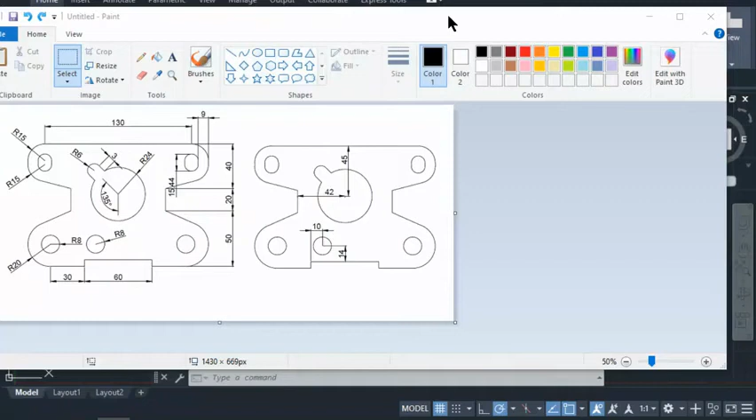All right guys, so in this problem here I'm going to walk you guys through how to do this with exercise number 2. As you guys saw in class, we already done most of them, so I'm going to keep going back to the beginning and start drawing for those who wasn't paying attention or need to see it again.

So let's talk about the problem before we do it. The height of this whole thing, as you can see on the right-hand side, is 40 plus 20 plus 50, that's all the way to the bottom up here. So that is 110. And then on the right-hand side here, you can see little steps right here. We need to figure out what that step's measurement is, right?

So you can see the center of this small circle down to that top ledge is 14. Now on the left-hand side here, the radius of this big circle is 20. That means from the center of that circle down to this edge is also 20. So that's 20 versus 14, so the difference here will be 6. So we can see that.

Now how I'm going to draw this is I'm basically going to use my mirror option. So I split this in half. I'll draw the left-hand side, and then I mirror it to the right. After I'm done with that, I can go back and draw the circles, the big one and the small one. So I'm going to do that at the end.

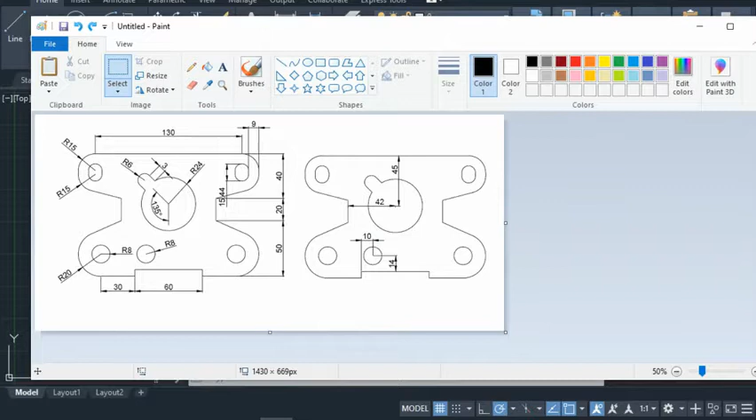All right guys, so let's take a look at this problem one more time. The measurement over here we're going to talk about, but first let's go up 104 — we did the math earlier if you don't remember. And then go to the left half of 130, which is 65. And then I'm going to go down 15 to get this first arc here, so I'm going to go ahead and draw that first.

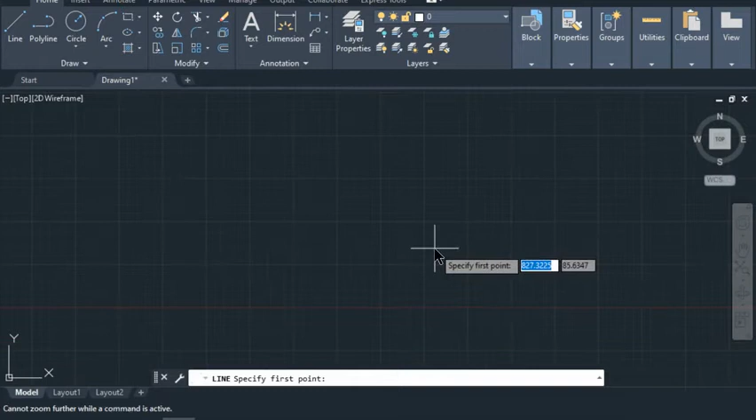All right, go into my line. I'm going to zoom in a little bit so I have more room to work with. All right, go up 104, 104, enter. And I'm going to go to the left with my snap line — make sure you have those snap lines on — and this is 65.

Now if you don't have this snap line on, this is how you change that. Make sure that all your center point, midpoint, end points, all of those show up. Make sure you have your angle snap showing on as well, and your tracking — make sure those are on and off. So make sure it's on for me, so you can see all those other things.

And then you can see when you switch between the ortho modes, those change, so make sure you know which one you're on. I want you guys to be on here because we'll work with some angles right here. All right, so we are done there.

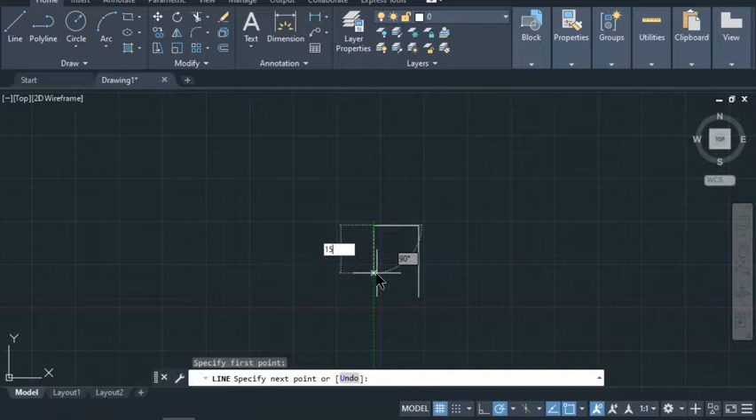Let's go down 15 as we said. We are going down there. All right, let's zoom in — double click your middle mouse or the wheel, that will zoom in, and then you can use that mouse to zoom out just a little bit. And the hand, if you hold down the wheel, you're able to pan left and right.

Okay, now something happened to my ribbon today — it's in this kind of form, so I have to open this to see the palette. But if yours is different than mine today, you saw we did it differently yesterday, so it's there. All right, so under properties we're going to go here, and by layer, we're going to click on that.

We right now have by block and by continuous. That was not part of our drawing, so we want to change this into a construction line or a center line. So I'm going to go to other, and the window shows up on my other screen, so I'm going to go over here. You click on load, and when you click on load this window shows up, and I want you guys to look for the center line.

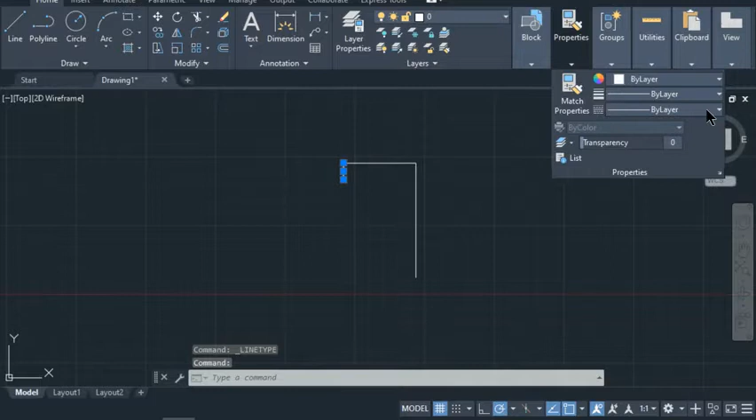So the long and short center line — this one right here will work. We're going to select that one, click OK, and it's there now. So we have that. I want to change this into that center line, so go to property, select it. Now it's there, center. All right, hit escape.

And then you can zoom in to see it's right there, it's the center line. You don't see that it's changed, but it did. All right, then we're going to draw that circle of 15. So we're done with that. The next thing we're going to talk about is this section here.

What is the measurement of this whole thing going to be? It's 15 down here, it's 15 right here, that little gap there. I went back and looked at this problem. The way they set this up for this measurement, the comma separates them. So they said that this right here, 44, is the distance between the two small arcs after they are offset from the side. I believe that yesterday we did the math and it came out to be 10.

But it's actually, let's do 10 to concentrate, because now if we are doing 44, we have to change the unit and everything else. So let's stay with that. We said yesterday that's 10, so we're going to use 10 for this right here. So we're going to draw in 10. And after we've done that 10, we draw another 15, and then we draw the big circle.

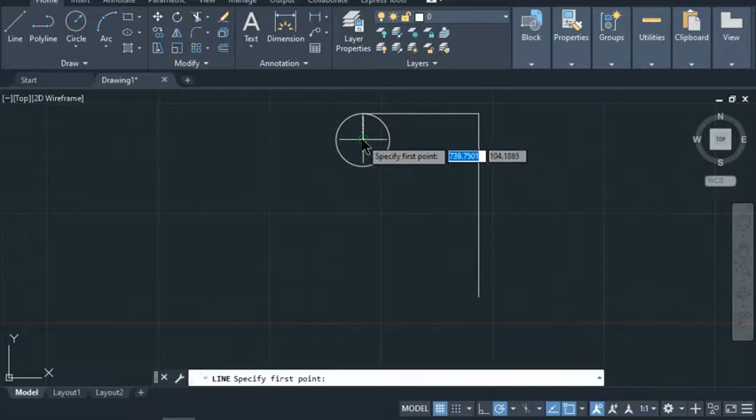All right, so let's go back to drawing. Here we're going to go down to be 10. And that 10 is also going to be a center line for us. Now, if you don't want to do the center line things, you can go back and trim everything that you add on, or you can do a color later, and I'll show you that next.

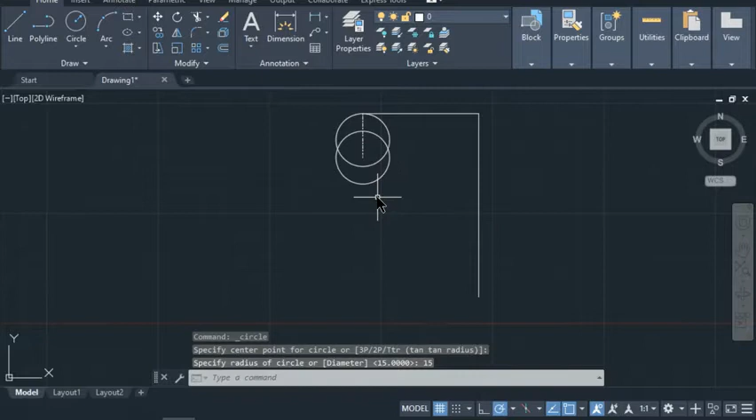But we're going to draw the circle now using this endpoint to draw a circle, and this is also 15. All right, so we have that. Hit escape. Now it may not be a good idea to change that to center line, because now we're going to use that. So let's change it back to continuous.

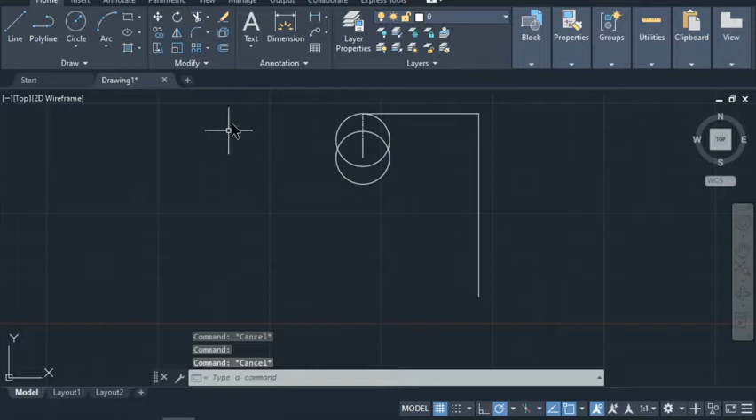We're going to use this to offset. We want to offset this to the left, and we want to offset this to the right, so we can connect the two circles here. All right, so let's do that. Here's your offset under modify. Click on that, and we want this offset to the left and the right, so we want its offset to be 15.

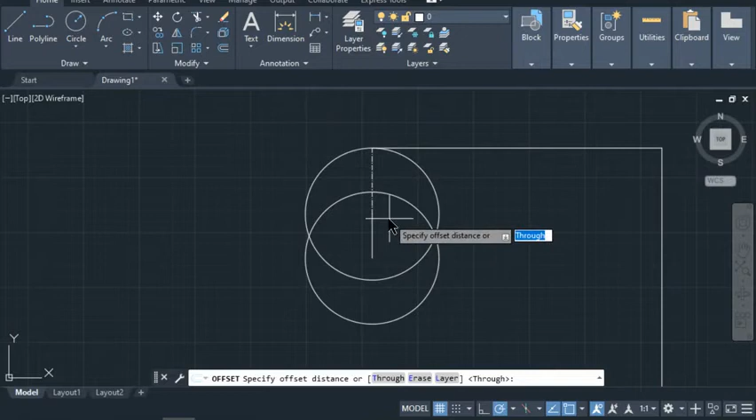So I'm going to click on it, try not to click on the center. I'm going to go ahead and try to zoom in. The center is when the triangles show up. So I'm going to offset this right here to the right. Let's go back here, offset, and then I'm going to put in a measurement, which is 15. I hit enter, and now I select the object. This one is snapped right there.

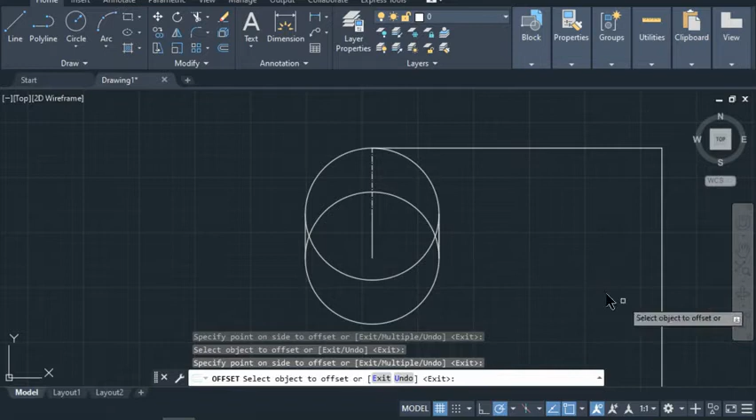I'm going to click. Oops. All right, click over here. It's there now. All right, and then we're going to do the same thing one more time. We're going to go to the right. There we are, so we got that offset. All right, we hit enter.

We're done. Now we want to get out of this offset. Make sure you hit escape multiple times, because escape doesn't change anything, it just gets you out if you hit it multiple times. Now what you're going to do is you can go and see the problem again. We can trim those later, we can work on that later. So we have that right there.

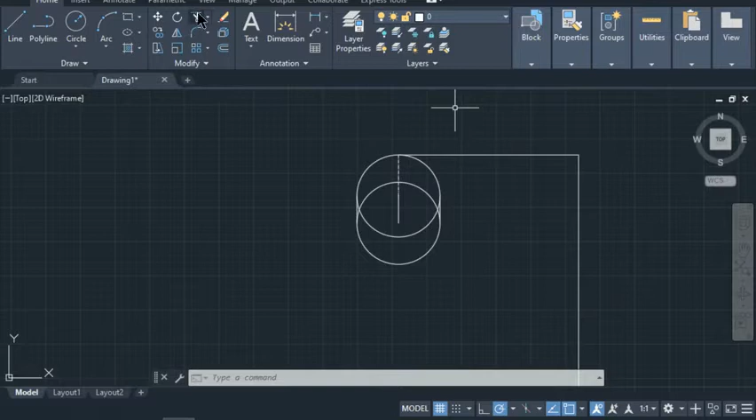Okay, let's just trim some of this so you can see, because this, we don't need this right here, right? All right, you don't need that. And then you can zoom in, you can see that we can trim this right here, and we can trim this right here as well. Let's do that right now. And we can also trim this right now.

So you guys can see this is what it looked like right here compared to our drawing, right, for the outside right now. But the outside arc doesn't have this one right here. We're going to trim that later, but we need to have this right here first. So let's go back here.

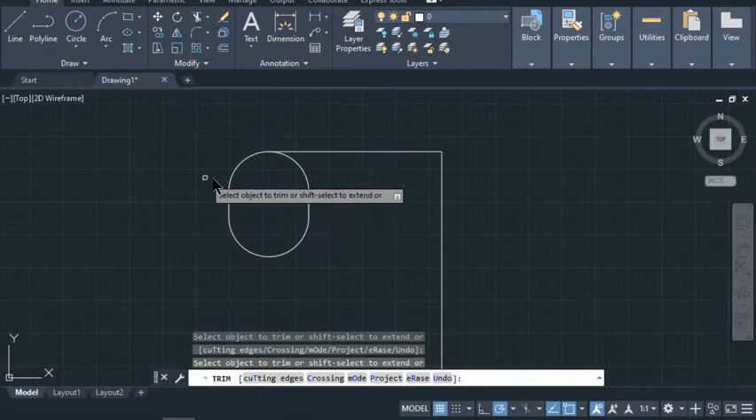All right, we're going to use the offset one more time, and this time we're going to offset it, the thickness of this right here is 9 units. So we're going to offset it 9 units. So we're going to put 9, enter, and then we're going to select what we want to offset.

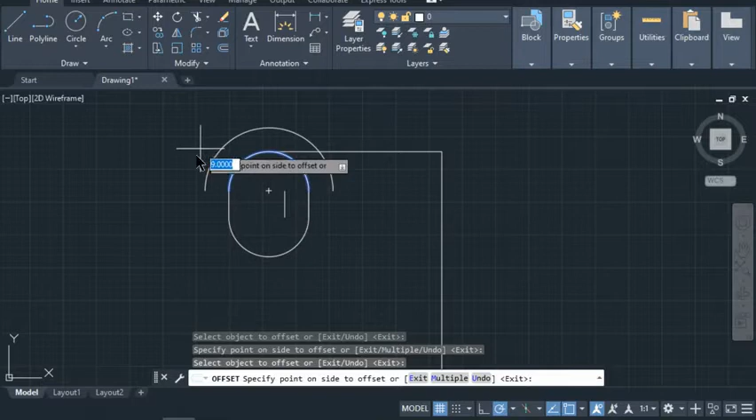There you go, and now offset again. You want it to be inside, on the inside. Offset again, on the inside. There you are. You have that right there. That's what you're looking for.

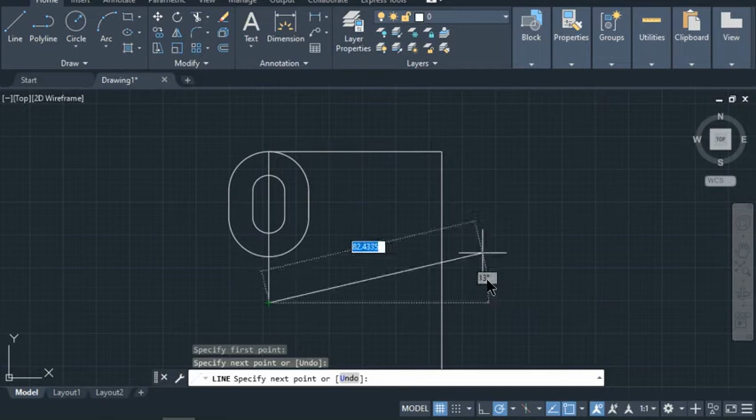Now if you really want to trim it, you can draw that line segment. Make sure it follows this green snap line, and then you can trim the big circle. Usually I don't do this until the end, but I'm doing it now so you guys can see the drawing as it comes into almost where it needs to be. As you can see, that's what it looks like now after you trim things. So you may want to wait for the trim later, but that's what it is.

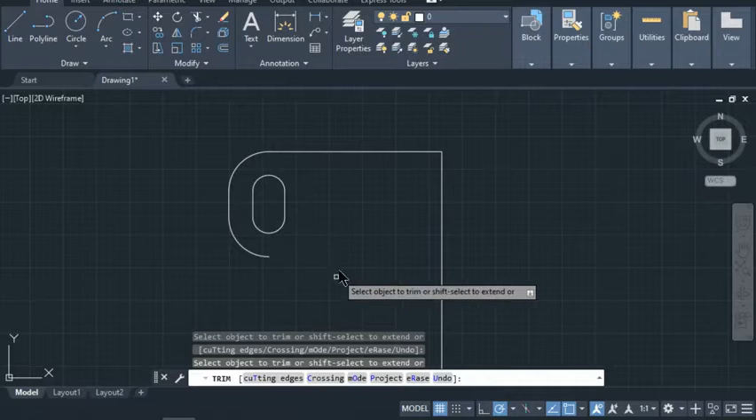All right, so here we are, got that corner, and we're going to stop right here. We're going to go back down to the bottom.

In the bottom here, I'm going to go right here again. I'm going to go to the left half of the 60, so it's 30, and then go down 6 and go to the left 30. I know the radius here for that point, the center, is 20 units up, so I'm going to go 30, 6, 30, 20. All right, let's do that.

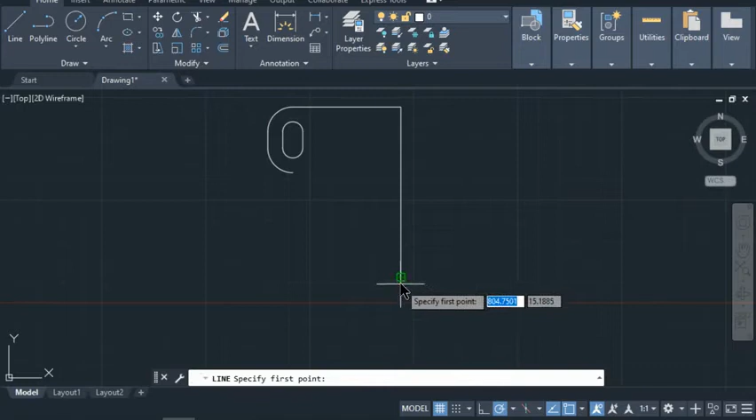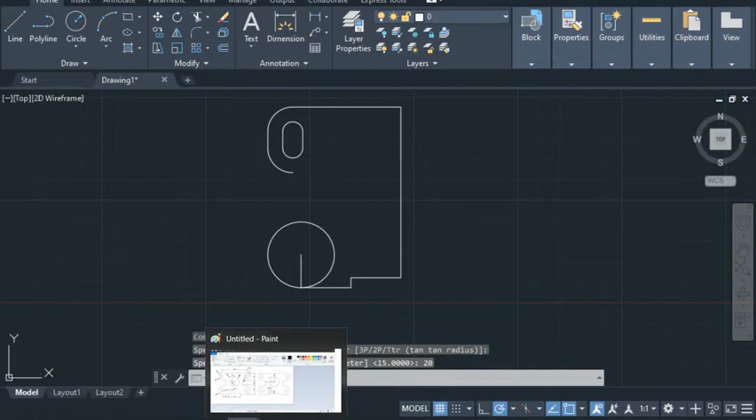And 20. All right, and hit escape. Here we can go in and draw that circle of radius 20 that we just established at the center point, this one. We also notice that this small circle shares the same center, and its radius is 8.

So we're going to go back to our drawing. We draw another circle here of radius 8. All right, so we got those circles, and let's go ahead and escape out of here.

So we have that. All right, let's go back to the drawing, and then we need to make sure we have this line somewhere here before we attach them to it. So we're going to call this halfway. Now, I remember yesterday we talked about this, and some people know that we don't know for sure. So we're just going to guesstimate here because of the measurements.

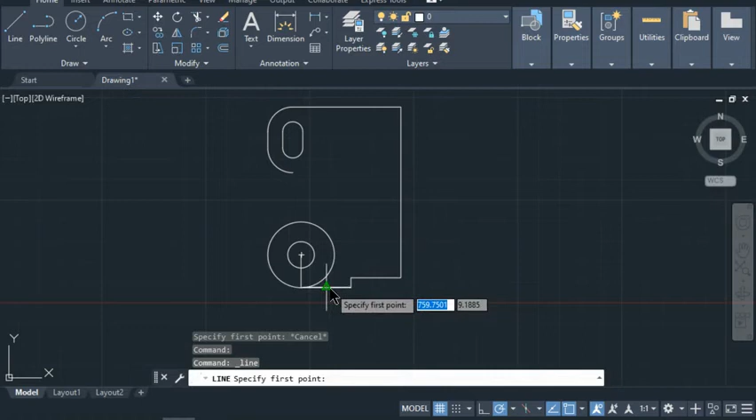All right, so let's go ahead, click on line, and then put it in here until we see our midpoint show up. I want to make sure our snap is turned on for the midpoint, so when we are in the line, you can see the triangle show up. That's the midpoint. I'm going to go all the way up here on the top. There we go, hit escape. All right, so I have that.

Now what I need to know is where is this one. This one is the same as this on the right hand side. You know the length of that is 20. We need that to be 20, and that is 40 from the top. So the top down 40 and the bottom up 50. That's basically how you do it. So let's go here.

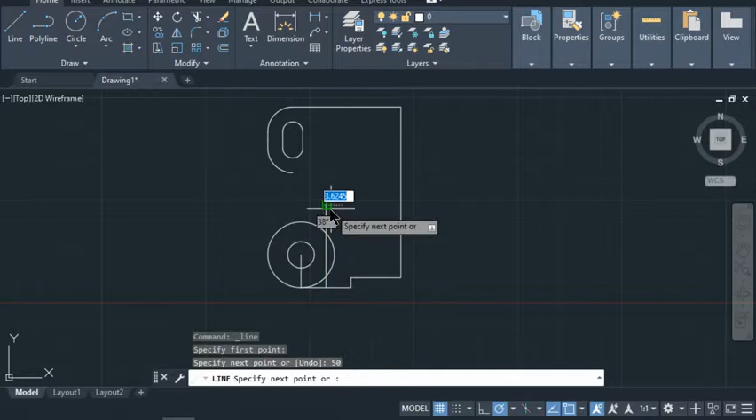There's two ways of doing this. You can get rid of this actually if you want to, and then go back to the midpoint and draw up 50. Then from there you can go up another 20. All right, so you have that 20, and then you can go back down here to this 50 and hit delete. So you're gone, you don't need that anymore. So that is a way of doing it.

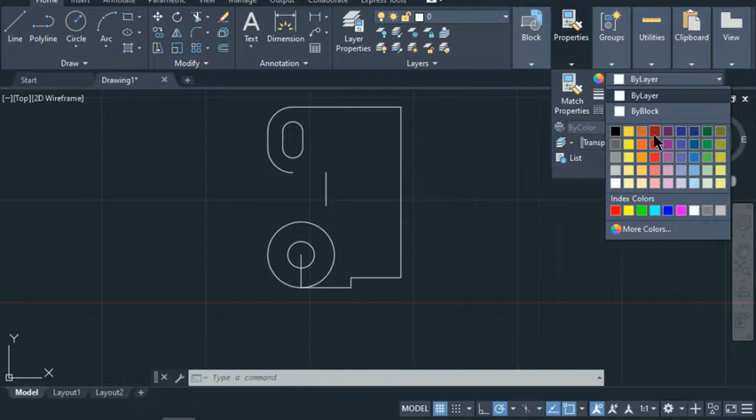And then all you have to do now is connect these two here. But before you even connect that, let's go and do this drawing. But first, I'm going to change the color a little bit. Under my property, I'm going to change this to red so you can see what I'm doing. Right here, I'm going to draw a line all the way up. It's going to be vertical.

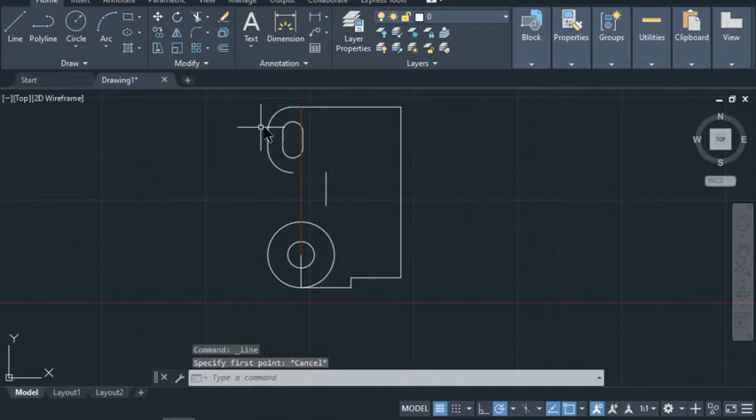Hit escape, and then I'm going to go over here at the end of that 65. All right, I want to make sure this is the line that I'm actually using, not the end of the 65, but this right here. I'm going to go there and find that.

I'm going to draw straight down just as far as it's across that arc. That's all I need, because I'm going to go here and trim. I'm going to trim this little arc right there, and when I'm done with that, I don't need this red line anymore. I trim it. Same thing here, I can go and trim this arc because I don't need that. And if I'm done with it, I can also trim this line segment, I can trim all of that.

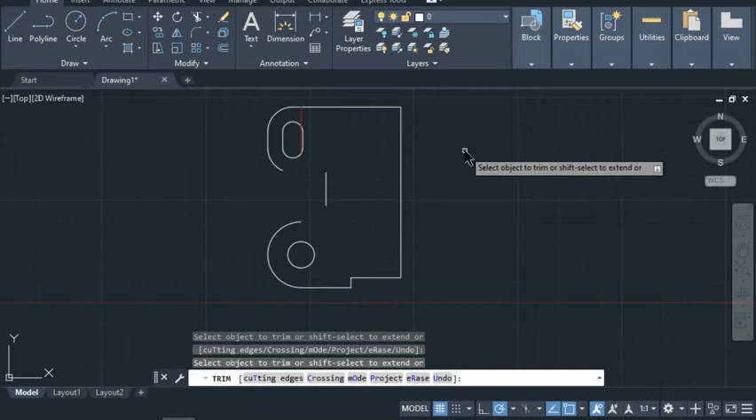All right, now I have to zoom in a little bit to trim that. Zoom back out. Now all I have to do now is just connect this endpoint.

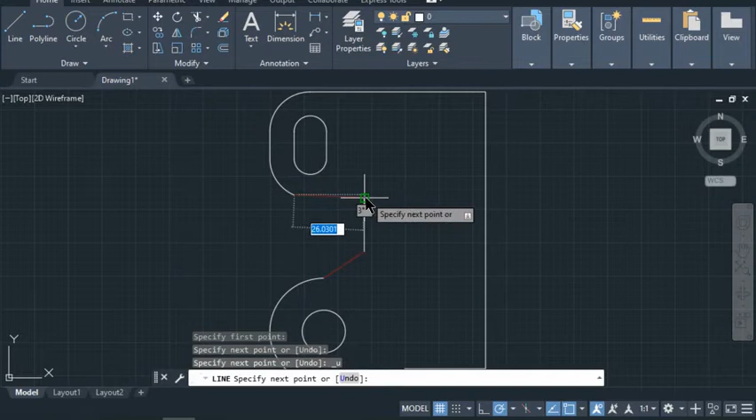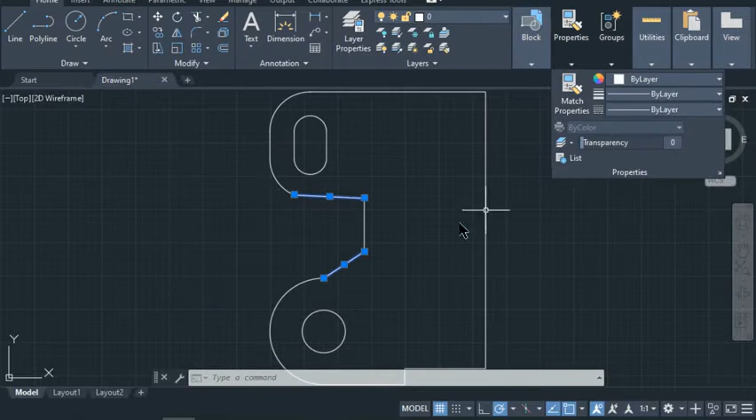And I know that is now in a different color than what we want, but we can undo that. I just need to snap into that location. What I need to do now is go back to property. I'm going to select both of them first, then change the layer under property back to white.

We have that problem right now. Now it looks almost the same as the drawing, but it is. We cannot zoom in right here, but if we zoom into here, there's a little gap, not straight all the way. So that is what we have on the left.

What we need to do now is use this information and mirror it to the right so we have the same thing. I'm going to go to the mirror option here, select object, select this whole thing. I have all of that. I'm going to mirror that about this point.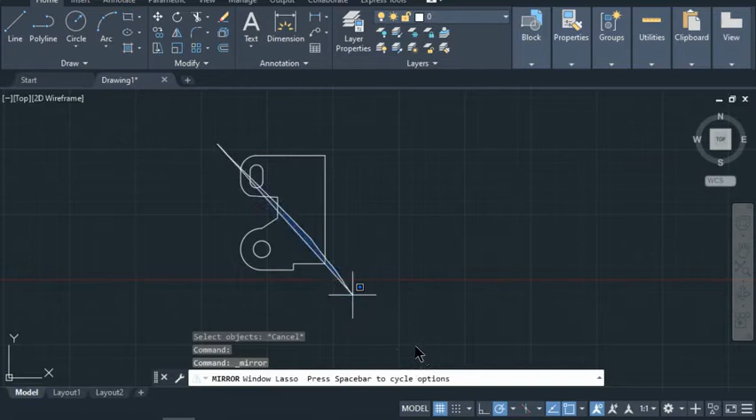Let me click on the mirror option again. I want to mirror this whole thing. I want it to mirror about this object.

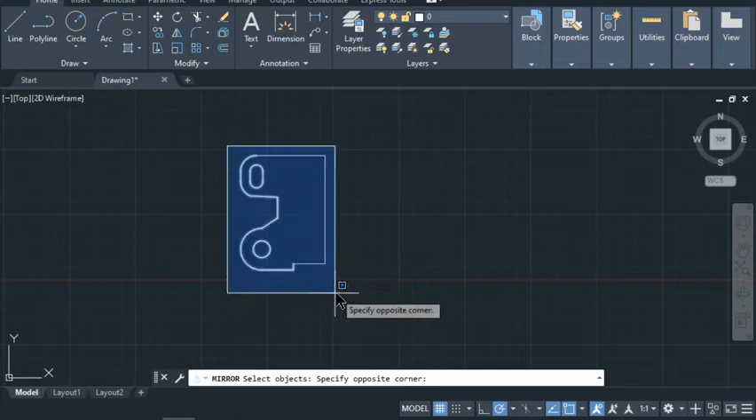It's not doing that for me. I'm sorry, I got the same problem yesterday. Mirror, I am in the mirror. Hit enter.

And I need to mirror it about this point, so now I can mirror around that. When I snap into that location, I just click enter, and it asks me if I want to erase it. No. But I'm going to do that again so you guys can see.

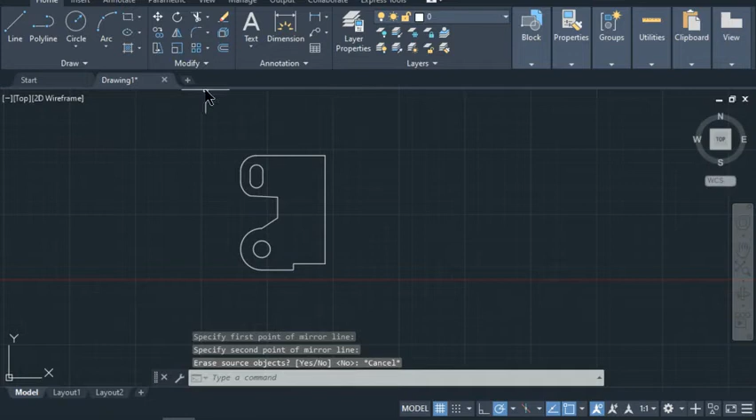Again, I click on mirror, I select everything that I want to mirror, I hit enter, then I click on this location on top because that's what I wanted to mirror about. Then I click on the other endpoint, and when it asks if I want to erase, I say no.

Here we go, we have that, same thing. What we're going to do next is click on here, and I don't need this line in the center anymore, so I trim it.

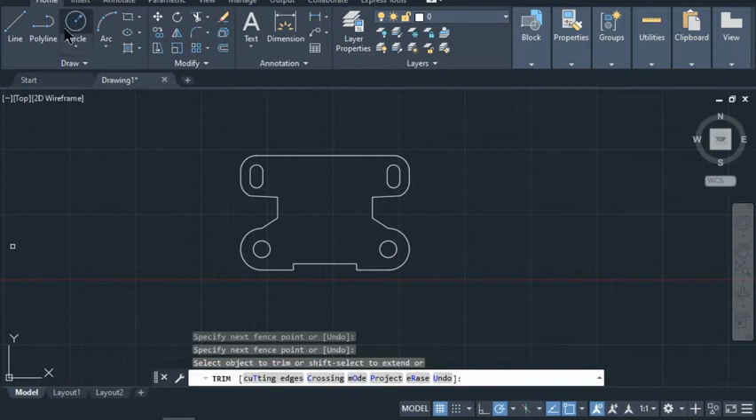So what I need to do now is draw this big and this small circle. The small circle is easy to do first. You can see the center here is 14 from the edge, and then it's 10 from the right hand side coming in. So I can go up 14 and then right 10 from this corner here. Let's do that, and I can do this in a different color so you can see it.

I'm going to go line, from here up 14, and then to the right 10. That will be the center where I'm going to use to draw my circle. I know my circle is going to be white, so I'm going to change it back to white. That's going to be 8. So there you go.

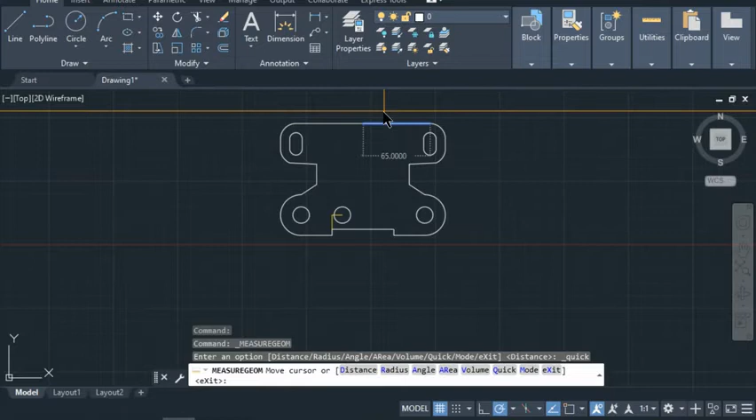That's the circle. By the way, if you click on the utilities, the measure, and click on quick distance, just a quick one, you can put your mouse everywhere and see your measurements. You can see that length is 20, that is 8, that is radius 20, that is 30. So 30 and 30 is 60, that is 30. Up here is 65, 65 and 65, that's 130. You can see all of those measurements, and you can see the gap, that's 9, because that's all the measurements that show up.

All right, let's go here and let's get rid of the yellow construction line that we created.

All right, hit escape to get out of it. Now let's go draw the last thing, which is the big circle. The big circle is 45 from the top down and 42 from the left in. That's the center, right? 45 and 42.

So what we can do is go back to our drawing. Here is our center, right? So we're going to go from there down. We need to go down 45, and then we're going to go to the left 42.

So let's do it this way. Let's draw them, down 45. Draw that first, hit enter, right? And then go escape. We're going to draw another line here, click the line.

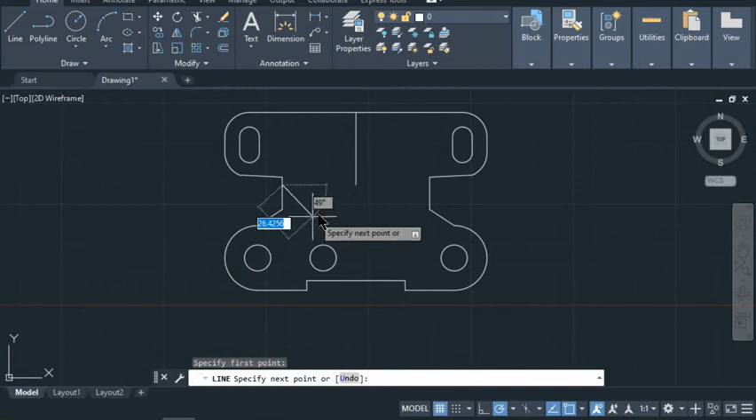We're going to go here, but we're not going to click on anything. Just move your mouse to the left side until you see this show up. And then when it snaps into that, when you have that cross, hit click, and then you're going to draw that to the right, making sure it's 42. Hit escape, and you can see the center is right here at the endpoint.

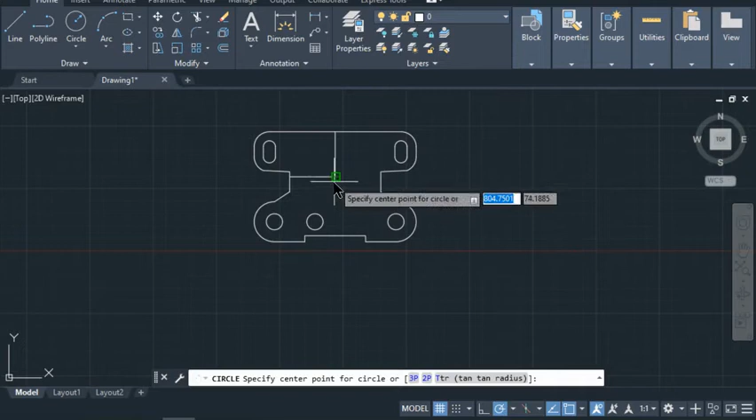If I draw a circle, that is the center. This is not it, right? We know that this distance from here to the top is 45, and it's 42 in from the left side. So that's why we draw this first, and then use that to draw this circle here.

And this is 24 in radius. All right, so when we're done with that, let's go ahead and trim the thing that we don't need right now, because we will create some lines that we need. Oops, we don't want to get rid of that center because we need it to draw something. All right, escape, let's go.

Take a look here. We need to have an angle of 135. That is where we're going to start drawing something so we can use as reference to draw this little bump right here. All right, the angle is 135. So let's go take a look here.

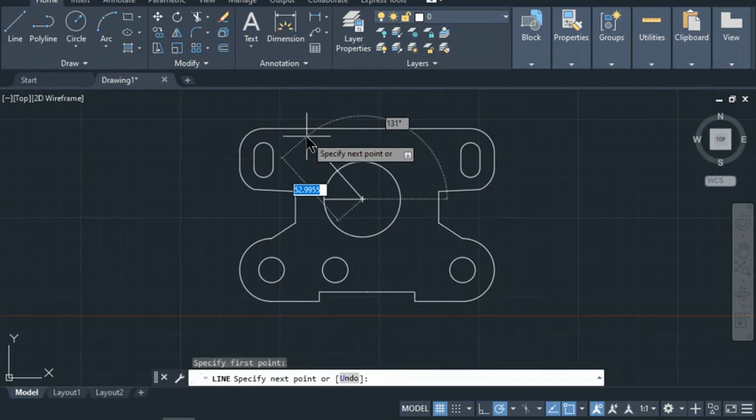Line, I'm going to go here, click, and I can drag it up. The angle that you see right now, that's 130. That angle is actually the same as this angle, because if I draw...

Let me change my brush too. If I draw something like from here... if I draw that line... Control Z, sorry. If I draw this, if I extend this right here, and if I extend this right up, you can see this angle here is the same as this angle on the right hand side, right?

So those angles are what we call vertical angles, so they are the same angle. So in here, this angle is the same as the angle that we need, so it's 135. That's what we need. All right, hit tab, because now we need to figure out how far we need to take this one out.

So let's go back to our sketch. All right, take a look at this. The radius is 24, so we're going to go out 24, and then you can see this is 3, so that means it's going to go up another 3, so that is 27.

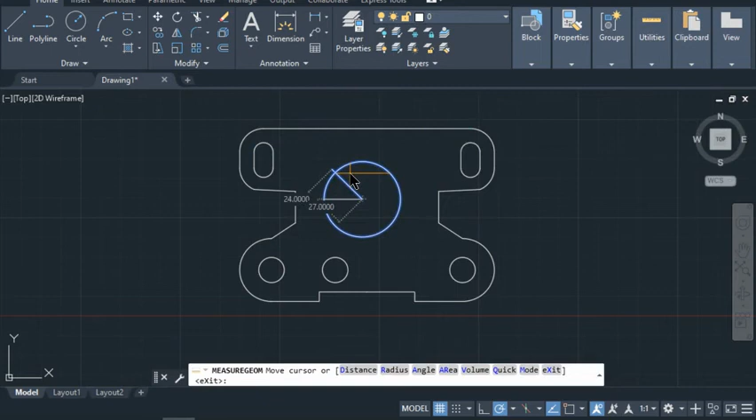We need to go 27 to get into the center here for this arc. All right, so I'm going to do that as 27, hit enter. Okay, I need to double check that that is 27. It doesn't look like it, but let me see here. I'm not sure if it's 27. It is 27. All right, hit escape.

I'm going to go ahead and trim what I need to trim. I don't need this. I may need this, but let's leave it there for a second. All right, hit escape. Let's go here and we're going to draw that little arc.

And I forgot the dimension of that. That arc is 6. The radius of that is 6. So I'm going to draw that, call it 6, enter. All right, and then you can go here and trim out the part that you don't need, which is here, but there's more stuff that you need to trim.

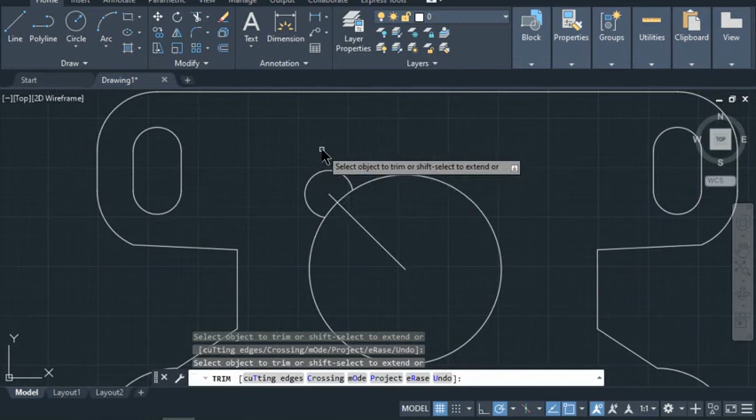So let's trim this first. But we have other things that we need to do. We know that this, we need 3 from here up somewhere. So what we need to do is this.

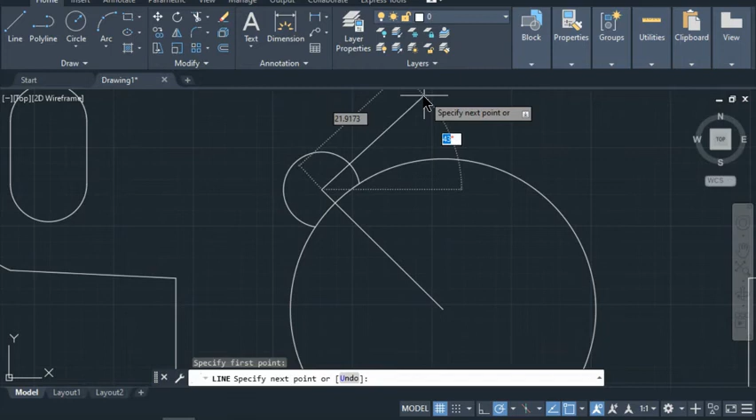Here, I need this to be 90 degrees to this line, right? So I need to make sure that I know what this angle is. This is 45. That means I need to go another 45 to be 90. So I have that line there. I'm going to click on this. I'm going to extend it out.

Escape. Let me zoom out a little bit.

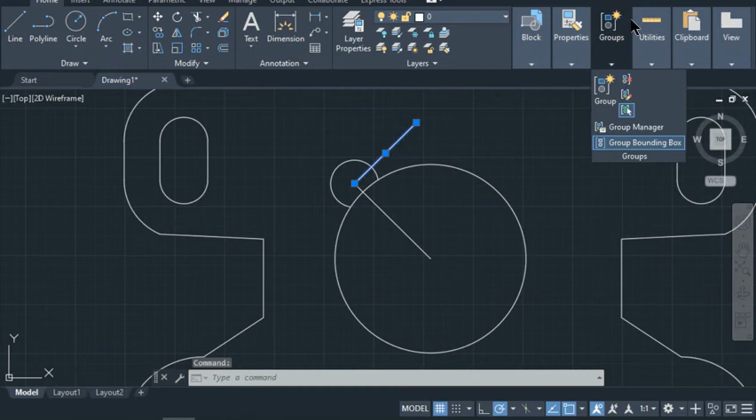This angle is 90 degrees. The way I created it, I want this to be my reference so I can get the endpoint on the left and right of this bump to draw it down here. I need this angle to be a 90-degree angle, so let me check - is that 90? Yes, it's 90 because you can see the symbol for 90 degrees show up.

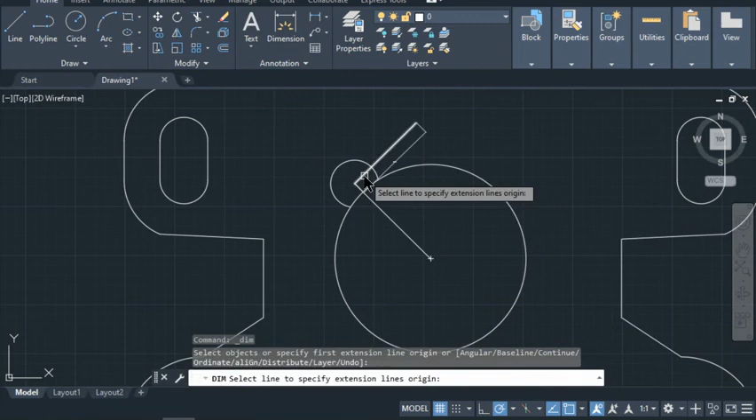Now the other way you can do it is go to dimensions and click on that, and here, and that should show 90 if I just let it go right here. Now the number is too small, right?

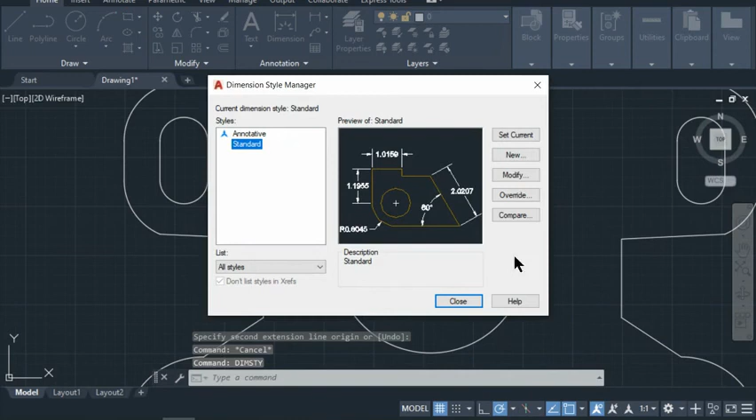I believe I already showed you guys how to change that. You can go to standard and modify, or simply write DIM style - dimension style - and it takes you to the same place. Click modify, and this window will show up. Click on text, and change that text to a bigger number. Let's say 2.5 would be good. Click OK and click close. That number should show up, and you can see the 90 degrees there. That's how you can see things.

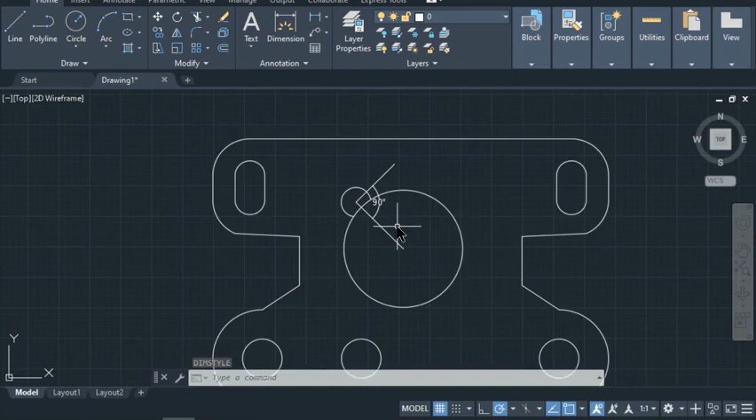We're going to get rid of this later, so I'm going to go ahead and get rid of it because I don't need it. Escape. I was just trying to show you guys that, so I'm going to get rid of it. I just need to make sure I also get this on the left-hand side.

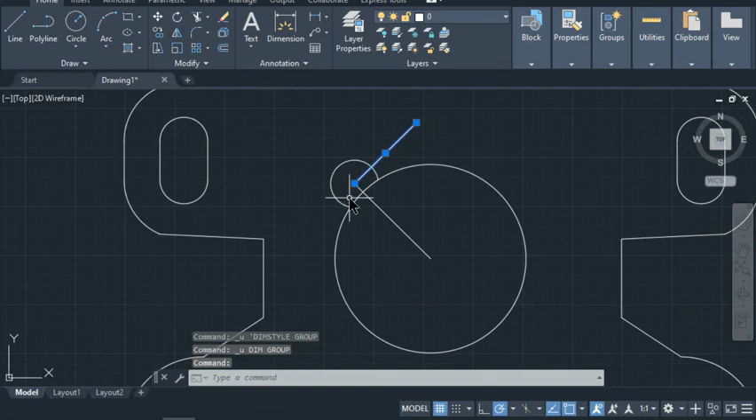So I'm going to click here, and let's see. I need to have my snap line there. That's the snap line, okay. I'm just going to end it right there. Let me zoom in a little bit.

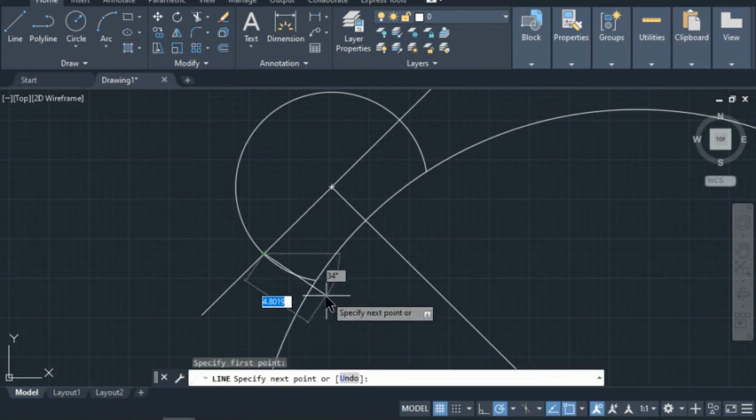What I'm going to do is take this line and make sure I can draw down. Now another way we can do this is I'm going to take this whole line - I believe that should be quicker. Offset - I can offset this whole line.

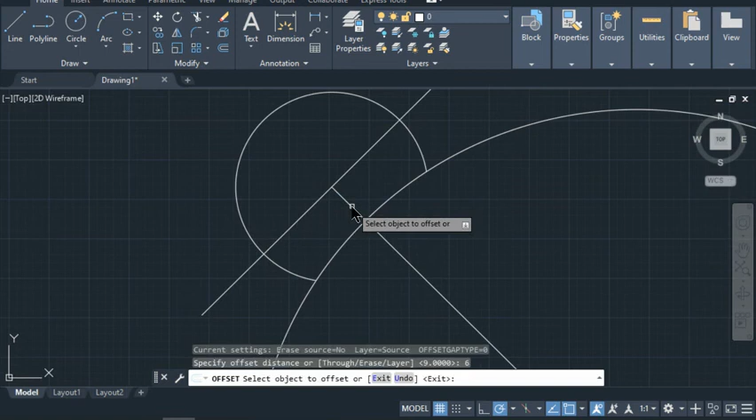I offset by the radius of this, which was 6. So I'm going to offset 6, enter, and click this line, and it's going to go right here. I'll click it. I'm going to click this line one more time, and it's going to go to the right. I'll click it. Escape - so you can see that I have those, right?

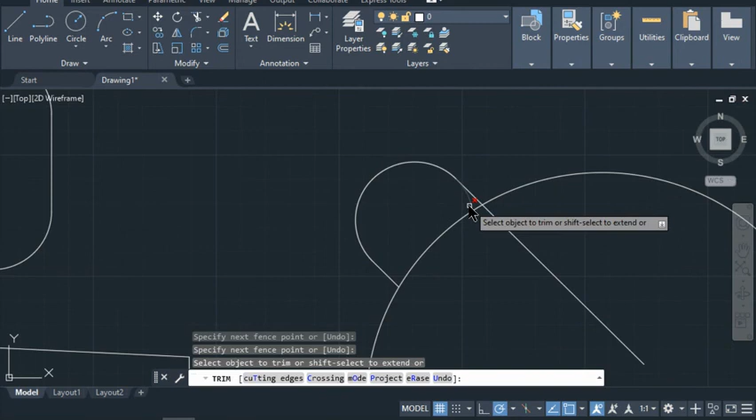That's another way you can do those lines, and then you just trim out the thing you don't want. So basically we did not have to draw this line here. All right, and then also that. So you guys see we got that finished there, and that's how you do it.

Again, all you have to do now is go in and put your dimensions from that endpoint to this endpoint. I want the whole thing to be 130. All right, the number just changed again - let me see.

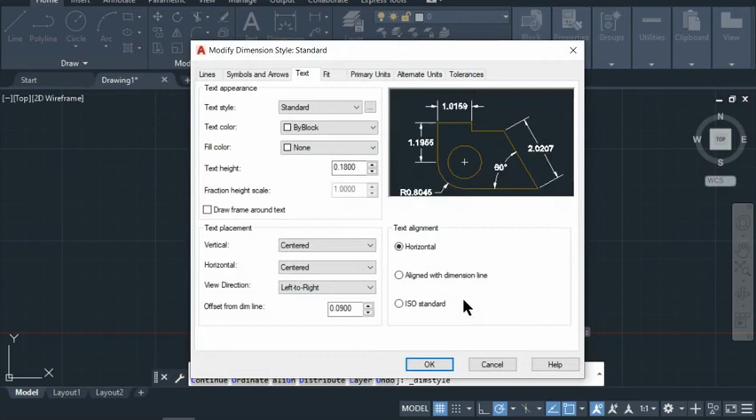We want it to be 2.5. All right, close. Something's wrong with my dim style - so dim style, modify text - yes, you are 2.5. Okay, close it. All right, 130. 2.5 is maybe too small there, so let's change it to 3.

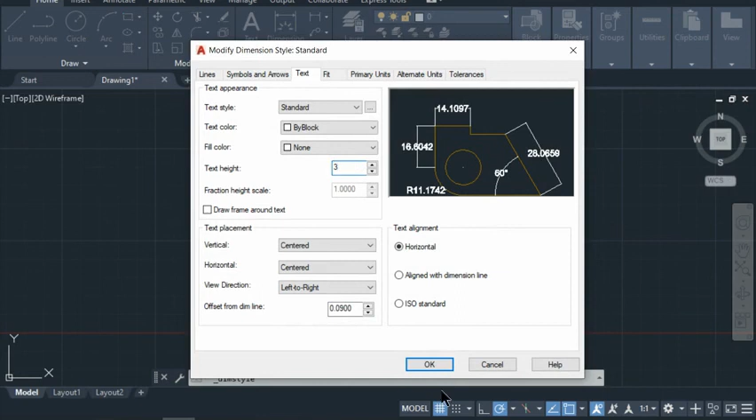The number is still too small for us to see, so 130. All right, let me zoom in. There you go, and you can put in all the other dimensions that you need. So just make sure we can check the dimension here all the way to the top.

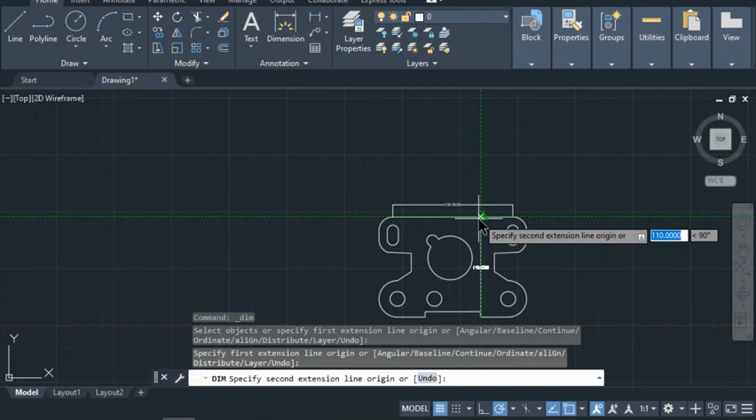That dimension should be 110, and then you can zoom in - you can see that it's 110. You can check all your dimensions if you need to, and I would prefer that you do it so we can see it. That's 40, all right, there you go.

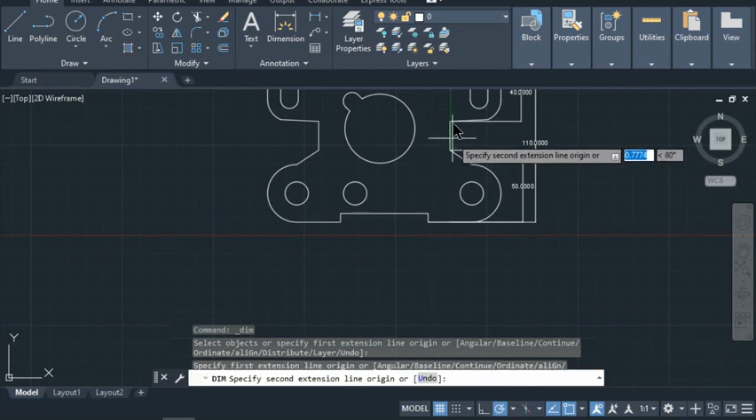And then the bottom here should be from here to there - always in dimension, yep. So basically the problem is done from here to there. That should be 50, and then this dimension is 20. So you guys can see all that dimension there, and those are the same as the dimensions we see here: 40, 20, 50, and then you can do the rest.

All right, this is how we make these problems. It takes a little time to think about the math, but after you're done with the math, everything should be fine. All right, enjoy - recreate this problem.